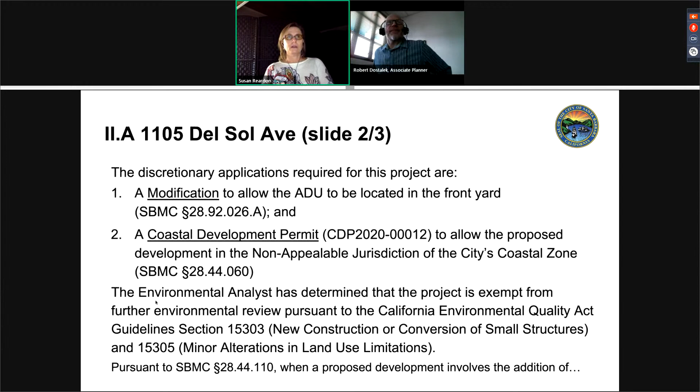Good morning, Ms. Reardon. I'm Robert Dostalek, Associate Planner with the Community Development Department. The project before you today is for a front yard modification in association with a new accessory dwelling unit located at 1105 Del Sol Avenue. I'll use the abbreviation ADU to reference accessory dwelling unit as we go through.

Pardon if my camera angle is a little odd — I'm in a new office and splitting my attention between a couple of monitors. Just to get a general vicinity, the project site is located in the East Mesa neighborhood of the city, approximately 90 feet southeast of the intersection of Del Sol Avenue and Barranca Lane.

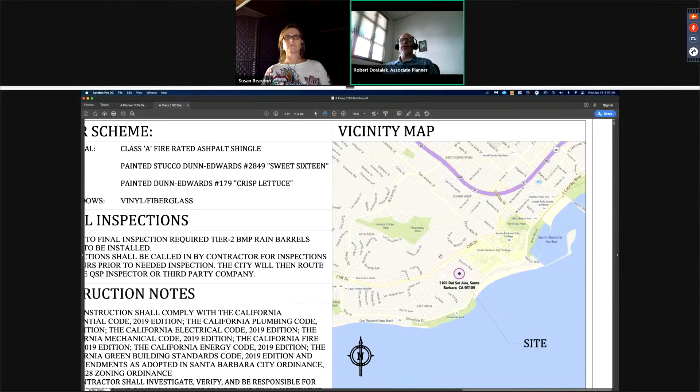Thanks for zooming in on the vicinity map. To give a little background, existing development on the site consists of a 1,175 square foot, one-story residence with a detached 255 square foot, one-car garage. As you can see in the color rendering, you can see the existing residence and garage at the end of the driveway here on the front page.

If we could zoom in a little bit on the site plan, Mr. Bolton, that'd be great. Barranca Lane abuts the rear portion of the lot and is classified as a public alley for the purpose of establishing setbacks. A 6-foot interior setback is required from the property line abutting Barranca Lane. The existing residence is set back approximately 25 feet, 8 inches from the interior lot line abutting Barranca Lane. A new detached 1,175 square foot ADU with an attached 245 square foot, one-car garage is proposed.

The project also includes approximately 80 linear feet of 6-foot tall fencing and approximately 260 square feet of new asphalt driveway paving. A front yard modification is proposed to site the ADU between the existing residence and Del Sol Avenue, and this is the subject of the public hearing. Otherwise, no improvements are proposed to the existing single unit residence or garage, and no existing structures, trees, or significant landscaping are proposed to be removed.

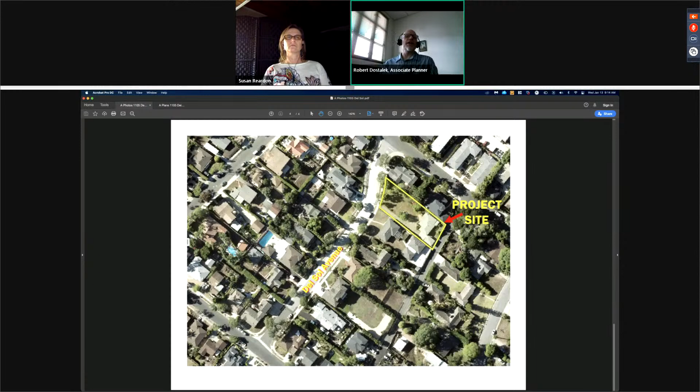Actually, Mr. Bolton, if we could pull up the last image on the photos document, if you have that available. Yes, so this is an aerial image of the block, and it gives a good sense as to what's going on in terms of the theme in the neighborhood.

Also, the adjacent parcel to the southwest, immediately to the southwest at 1109 Del Sol Avenue, is also developed with 2 dwelling units that are sited in a similar fashion on the lot. In other words, a front unit in proximity to Del Sol Avenue, and then a back unit in proximity to Barranca Lane. And although in 2 separate parcels, the 2 adjacent residences to the north and northeast of the subject parcel are also sited in a similar manner as is proposed.

Further, with a maximum height of 16 feet, the proposed accessory dwelling unit would be compatible with a mixture of 1- and 2-story structures in the surrounding neighborhood with varied heights. Moreover, although the surrounding neighborhood does not possess a defined architectural theme, the design of the ADU would be compatible with the rather eclectic mix of existing building styles and exterior building treatments along both sides of Del Sol Avenue.

For environmental review of the project, the scope of the entire project can be found categorically exempt from further environmental review under sections 15303 and 15305 of the California Environmental Quality Act, more commonly referred to as CEQA. For design review, neither the ADU nor attached garage trigger design review at this location.

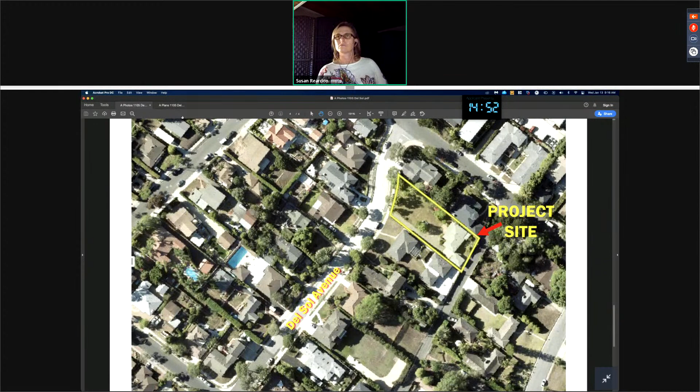Thank you, Robert, for your presentation. It was thorough. The only thing I have to add is that the reason why we are applying for this modification is that building a new accessory dwelling unit at the rear of the property is not feasible due to how close it is to Barranca Lane, which is why we're asking for the modification.

Okay, I think that Robert covered the rest of it. Okay, great, thank you. I do see that Richard Ross is here as part of the attendees list. Do you know if he would like to provide additional comments?

Tarn? I can promote. Not that I'm aware. Actually, here, I'll promote him 'cause I see his hand raised. Yes, okay. There you go, Richard. I promoted you and I'm unmuting you. You can go ahead. Oh, okay, you're self-muted. You can unmute yourself and provide your name for the record and provide additional comments if you'd like.

Richard Ross. We've had this property for almost 30 years and we're anxious to build something here and make it a nice part of the neighborhood that we love. Okay, great, thank you.

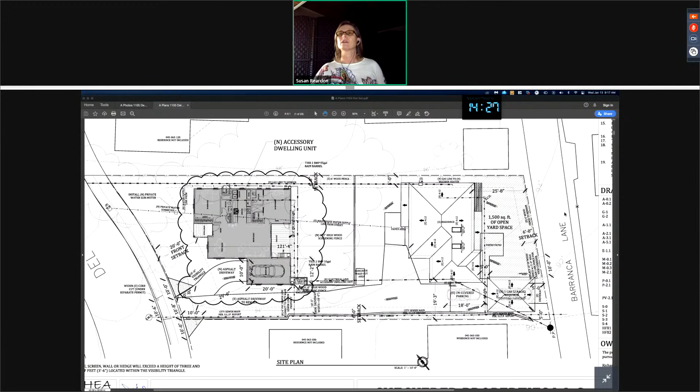I don't have any additional comments or questions for the applicant at this time, so I will open the public hearing, and I'd like to note that the public hearing is only on the modification, front setback modification request. State law states that the public hearing is not for the accessory dwelling unit, but it needs to be approved ministerial. But the fact that it needs a coastal development permit, then it does need to be reviewed by the staff hearing officer. However, there's no public hearing on that part.

So if you would like to address the staff hearing officer on 1105 Del Sol Avenue, you can do so by clicking on the raise your hand icon, shown on the screen right now. If you click it once, it'll raise and be indicated by a red arrow. If I see your hand raised, I will turn on your microphone and you'll have 2 minutes to speak. So if you'd like to provide public comment.

I see no one raising their hand. Mary, have we received any emails or indications since the meeting started? Thank you, Ms. Reardon. We have not received any written public comment for this item. Okay, great. So I'll close the public hearing.

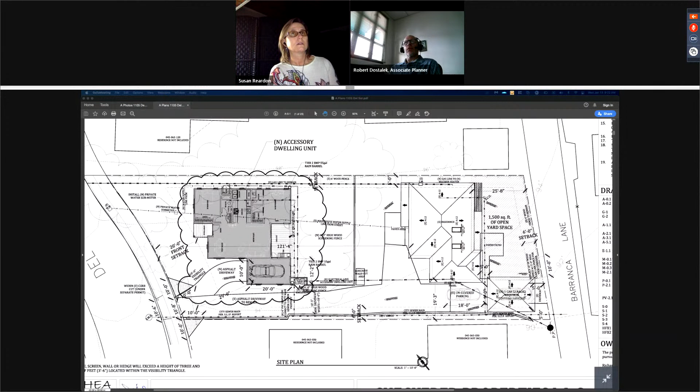The last form that was sent—could you remind me, was it within the last set of plan corrections? No, it's attached to the written staff report that was prepared for this meeting. So it's attachment or Exhibit A, and it has the conditions of approval for the coastal development permit and modification. Many of them are just standard conditions in terms of what type of recorded agreements you need, and what kind of information or agreements or other permits need to be completed prior to the issuance of a building permit. And then it also has construction related conditions.

Yes. Okay, all right, great. So I just wanted to make sure before I took an action on your project that you had a chance to review the conditions of approval and that you understand them.

So with that verification, I could make the findings for the modification as I discussed the amendments to them, and also for the findings outlined in the staff report regarding the coastal development permit, and approve the project subject to the conditions of approval contained in the staff report.

And my action on the modification is appealable to the Planning Commission within 10 calendar days. They also have oversight authority of all my actions, and if they felt this warranted additional discussion before them, they can call it up during that same 10-day appeal period. If either of those actions would happen, Robert would contact you.

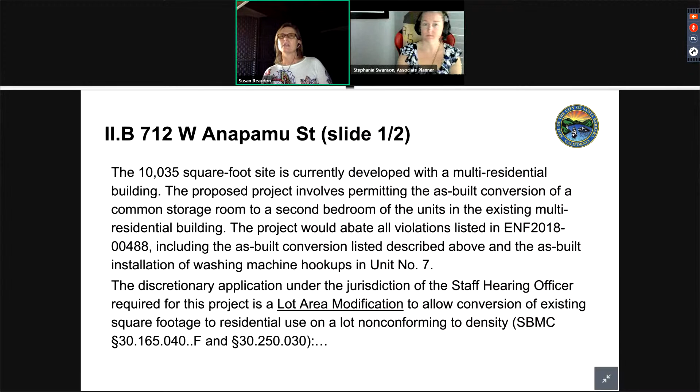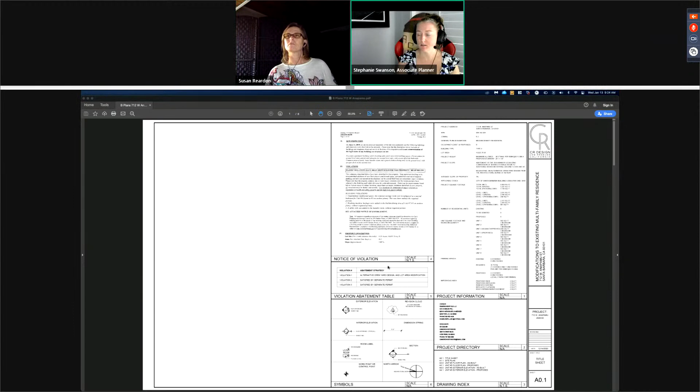So anytime you're ready with the staff report, that's good. Okay, and Timmy, if we can just go to page 2 on the plans. Okay, we are looking at a 10,035 square foot R2 zoned lot at 712 West Anapamu.

There's an existing 8-unit apartment building that is non-conforming to density. By today's standards, only 2 units would be allowed on this lot because of the R2 zoning. The proposal includes legalization of an as-built conversion of a storage room to a second bedroom for one of the units, and abatement of all violations listed in ENF 2018-00488.

The conversion—Timmy, if we can move to page 3—so there's the storage room. Essentially what happened is that the door between the laundry and storage room went away, and then another door was added into the unit, which we can see on page 4.

The conversion of the storage room to a bedroom exceeds an allowable conversion on a lot non-conforming to density. Title 30 allows for 50 square feet to be added to an individual unit by right, but the bedroom in question is approximately 178.5 square feet. So we do need a lot area modification to be approved for this configuration to be approved.

This is also a non-conforming building to density and configuration as well. The R2 zone typically allows for 2 units in a building. So we did review the non-conforming section of Title 30, specifically 30.165.040.F. Alterations are allowed.

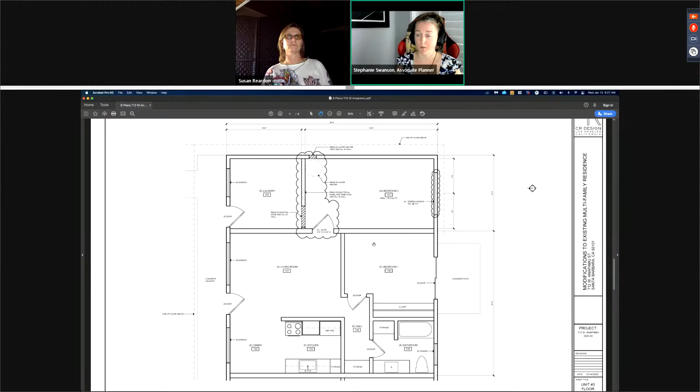Thank you. Alternative open yard essentially waives private open yard requirements in lieu of a large common open yard. The Architectural Board of Review has reviewed this proposal and offered support for the conversion of the storage room to a bedroom and the proposed alternative open yard design.

Here on the site plan, we can see that the minimum 10 by 10 dimensions of common open yard are far exceeded—they're showing approximately 37 by 35 feet. Only 15% of the lot area is required for alternative open yard design, but in this case approximately 25% is shown. This area consists of lawn and a barbecue for all tenants to use.

The staff report included a comment that the ABR would be the decision maker for the open yard request. However, Title 30 does have a clause that allows the staff hearing officer to review the alternative open yard design with other discretionary approvals, such as a lot area modification. The alternative open yard design is not required to be noticed and can be part of the decision today if you see fit. There are 2 findings to make, which are now in the chat.

So the findings in the staff report would need to be elaborated upon if the staff hearing officer would like to make a decision regarding the alternative open yard. Those two findings are: one, that the alternative open yard design is necessary to provide flexibility in architectural style or site organization, such as preservation of natural features, enhanced circulation, or shared amenities like the barbecue and lawn area. And two, that approval of the alternative open yard design will meet the purpose of the required open yard as described in this section.

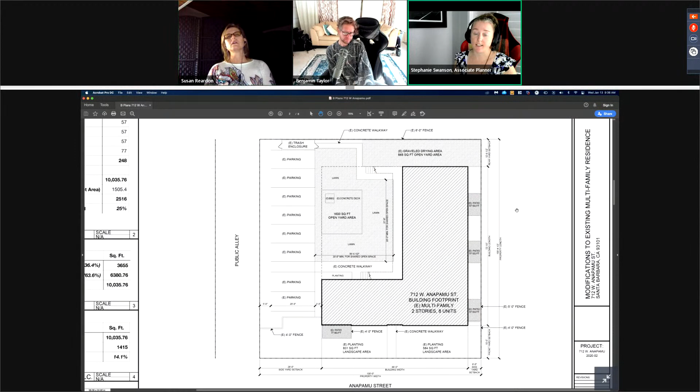So it's not a specific requirement. It does say usually only granted, but it's not a requirement. And we felt that it's larger than what's allowed by right, but it is small in that it's 178 square feet.

This happened sometime between 1964 and 2021, and we don't have definitive records saying when it occurred. For those reasons, we felt affordability was not necessary.

Well, it's interesting that your example is what I stated, that I have approved lot area modifications. Like it says, it's usually not required for back of house type situations. In your example case, it's expanding an existing bedroom, it's not increasing the density more, so the density remained the same. In this one in front of us, it is increasing the density. It's changing the requirement. So, okay, well, thanks for that additional clarification, Stephanie.

In regards to the alternative open yard proposal, it is appropriate. I went to the site and there is a large communal area, which in my opinion more than offsets the several units that don't have open, private outdoor area.

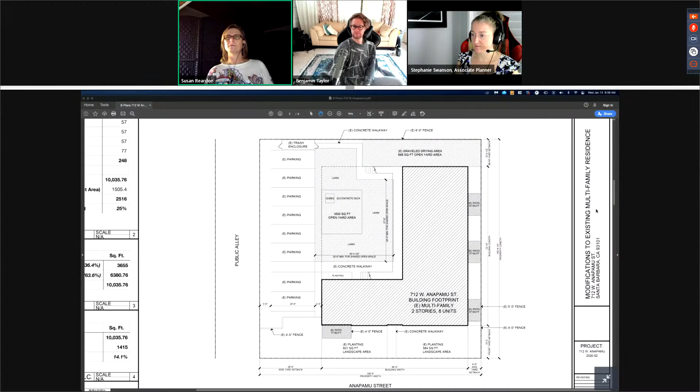Good morning, Ms. Reardon. Danny Kato, Senior Planner. You've heard the discussion, and you've been here quite a long time in terms of development projects and such. I was wondering if you could add additional thoughts on this, because that's the one item I am struggling with.

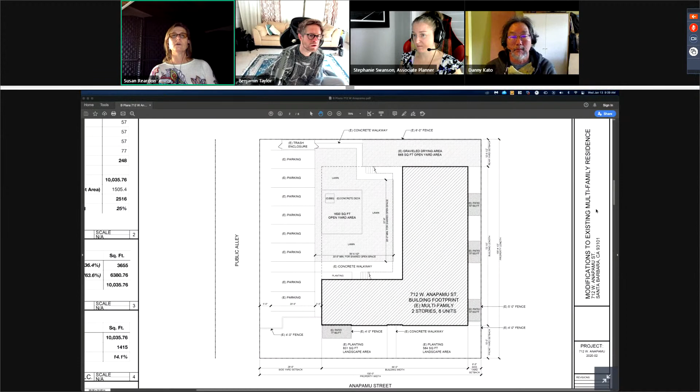I agree, it is a good project in terms of providing more range of unit types for the city. But in terms of the findings I'm required to make, I don't see how increasing the density on a non-conforming site is consistent with the purposes and intent of the zoning ordinance without providing some type of affordability. Because the zoning ordinance contains provisions in terms of densities and what the vision is, it implements the vision of the general plan for the neighborhood. So the fact it's non-conforming to those provisions and they're asking for increased density without providing affordability, that's what I'm struggling with.

So let's take a step back for a second and talk about density. This property is zoned R2. In an R2 zone, the density is calculated as number of units per acre. It's not size of unit, it's not number of bedrooms, it's just the number of units. 3 bedrooms, 10 bedrooms, studio units, they're all considered the same density in R2 zone.

So if we look at it from that standpoint, increasing the size of this unit and increasing the bedrooms in this unit is not really an increase in density. I mean, it's an addition. We have to come for this mod for lot area because it's new habitable floor area. So the mod is necessary, but really, because it's already overdense and you're increasing the size, we need the modification.

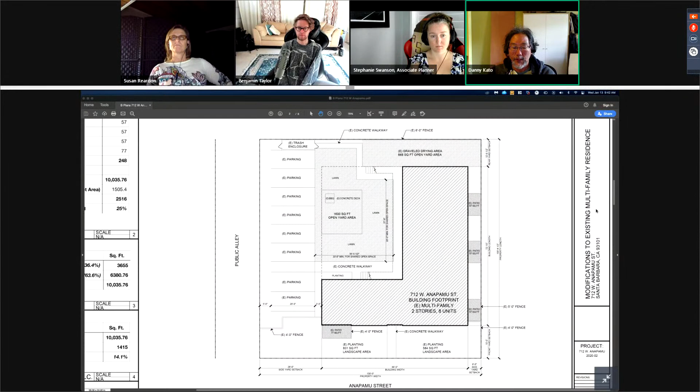If we could switch to the floor plan again for just a second. It's now a 2-bedroom, and when you were talking about the other example that happened in 2019, that was an increase in size to a bedroom and you were okay with that. I don't see this as a whole lot different, but if they just took away the wall between bedroom 1 and bedroom 2 and made it a giant 1-bedroom unit, would that change anything from the way you think about it?

It doesn't to me, which is why we didn't ask for affordability. And Danny, thank you so much for clarifying that point about R2 versus R3, R4 zone. I was thinking of it in terms of R3, R4, not the R2 zone, which is unit count. So you're perfectly correct, and that's a great point for you to point out.

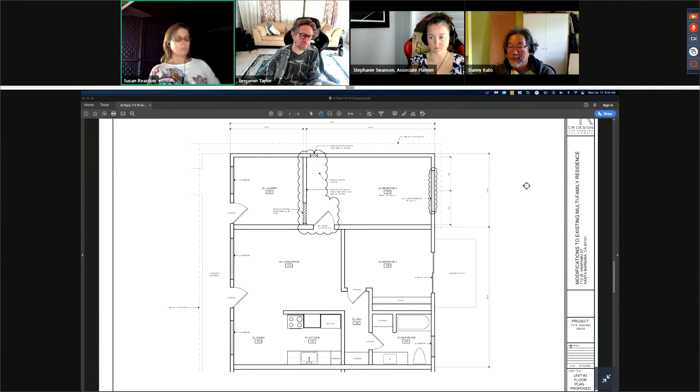That alleviates my concern, because I would agree, if it's not technically increasing density, and the R2 zone is not regulated by bedrooms, then in this existing floor area that's being converted, I can make the finding proposed by Stephanie in the staff report. So I appreciate your additional comments, Danny.

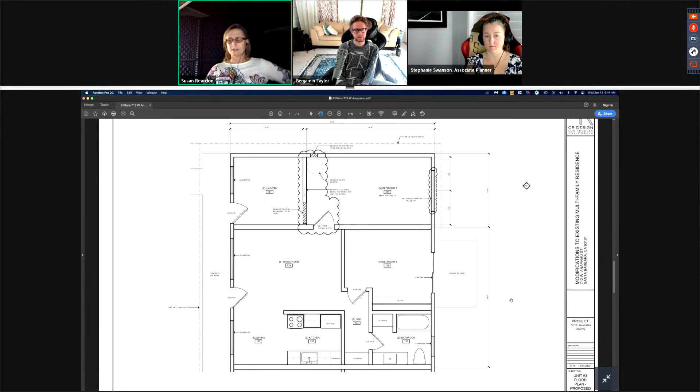In terms of the alternative open yard area, I would prefer that I make the findings. I'm sure the applicant would be okay with that, because when you're asking for a lot area modification, open yard is an important factor to take into consideration. The design of the existing building, or the layout, really limits where private outdoor living space can be provided, and there are 2 larger areas on the site.

I like the way the building's kind of partially wrapped around that large open area, because it provides a sense of community, I believe. So in regards to the required findings for the alternative open yard design, I could support that.

In addition, if I'm the one making the findings for the alternative open yard request, it would possibly then be able to go back to the single family design board and be administratively approved, since really the only exterior change is the window. So that would be a benefit in terms of fewer steps for the applicant.

Ms. Reardon, I just want to clarify, Architectural Board of Review. Oh, yeah, sorry. Yes, it is the Architectural Board of Review. Thank you, Stephanie.

So I don't see any proposed conditions of approval in the staff report, and I do not need to add any conditions of approval to make the findings. So with that, I will make the findings for the lot area modification as outlined in the staff report.

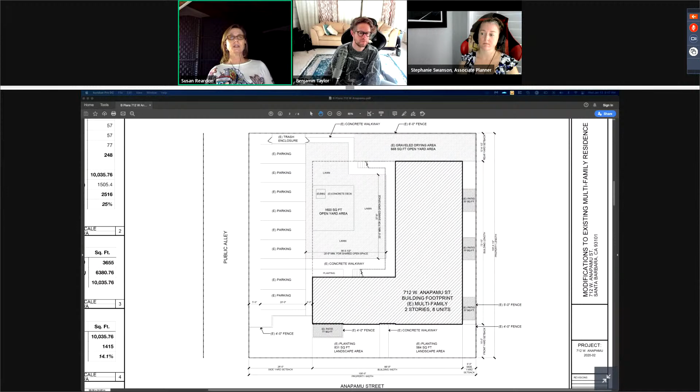So like I said, the alternative design is appropriate. It provides a large communal area on the site. My action is appealable within 10 calendar days to the Planning Commission, and they also have oversight authority of all my actions. If the liaison felt this required additional discussion before the Planning Commission, they could call it up during that same 10-day appeal period. And if either of those instances would happen, Stephanie would contact you. Okay?

Thank you, Benjamin. Thank you. So we'll move on to the next item, which is 26 American Avenue.

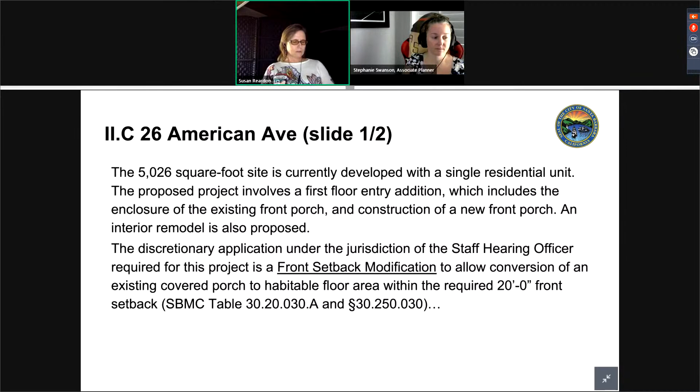And Stephanie's the case planner for that project too. So if you would like to provide your staff report, that'll be good. Timmy, we can hang out on page 2.

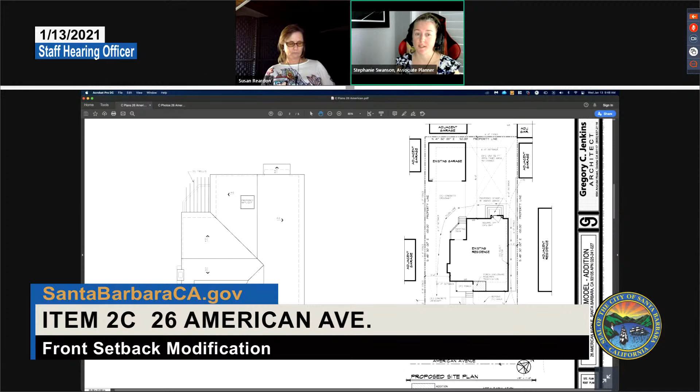Okay, so with 26 American here, we are looking at a 5,026 square foot RS 7.5 zone lot. It's developed with an existing single family residence that is non-conforming to the required front setback. Timmy, if we can zoom in. So if we see the setback line there, a portion of the house and most of the existing front porch is within the front setback there.

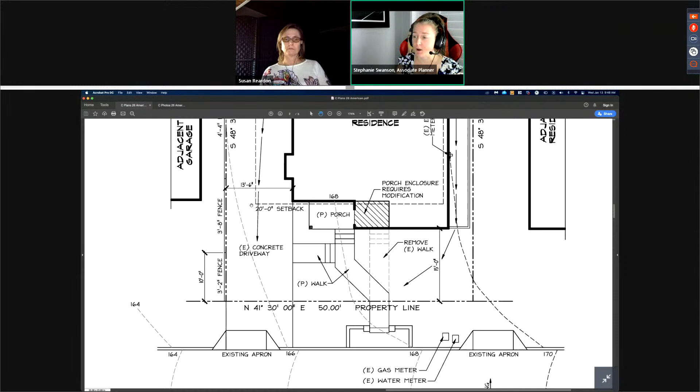The proposal includes a small addition and enclosure of the existing front porch located within the front setback, and construction of a new front porch. Tammy, if we can go to the next slide.

The new front porch is proposed within the required front setback, but it is an allowable encroachment as outlined in the staff report. What does require a front setback modification is the conversion of that existing porch to habitable floor area within the front setback. Staff is supportive of this because it's approximately 35 square feet, and it won't be expanding the nonconformity in the sense of the building getting any closer to the right-of-way on American Avenue.

The project was reviewed by the Single Family Design Board with positive comments. The board did recommend adding a window to the proposed entry room, which we do see there, and is included as part of this front setback modification request.

And then in regards to environmental review, the applicant did submit an archaeological report because the area is in an archaeologically sensitive area. The report concluded that there is probably nothing on site, but did recommend a standard condition of approval related to the unlikely discovery of archaeological artifacts as included in the staff report. And that is the end of my presentation.

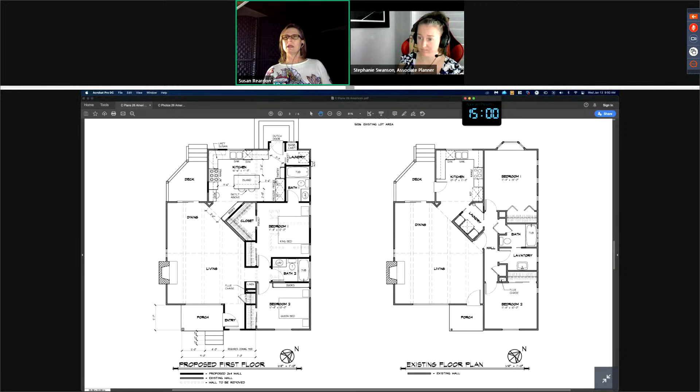I'm Greg Jenkins, representing Michael and Karen Sloan, the owners. Ms. Swanson did a great presentation, and I'm here to answer any questions if you have some.

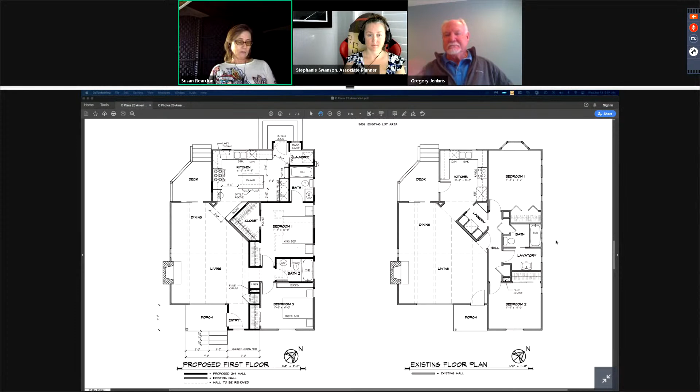So with that, I'll make the finding as outlined in the staff report and approve the requested front setback modification subject to that condition of approval. My action is appealable to the Planning Commission within 10 calendar days, and they also have oversight authority of all my actions. If they felt it warranted additional discussion before the Planning Commission, the liaison could call it up during that same 10-day appeal period. And if either of those would happen, staff, Stephanie, would contact you, okay?